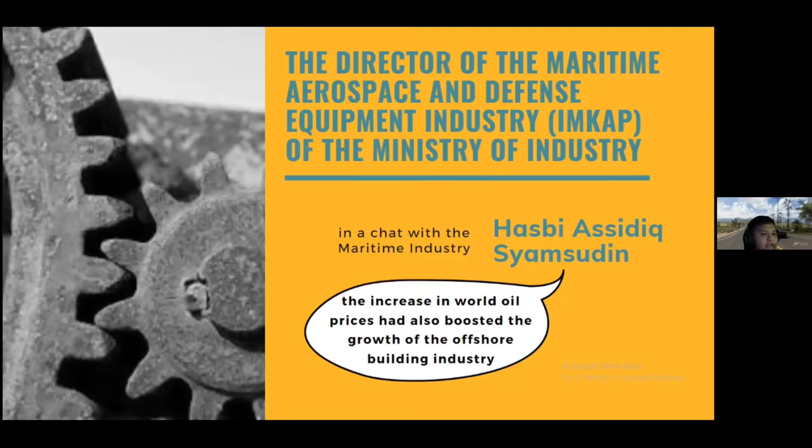Okay, in 1964 to 1965, American oilmen had tried their luck in Indonesia, but they were unsuccessful to obtain a contract to a search area northwest of Java for offshore oil. Then in early 1966, they finally got the contract after negotiating with the government and signed a production sharing agreement with Permina. The company that was first on the offshore scene in Indonesia was Independent Indonesian American Oil Company, IIAPCO.

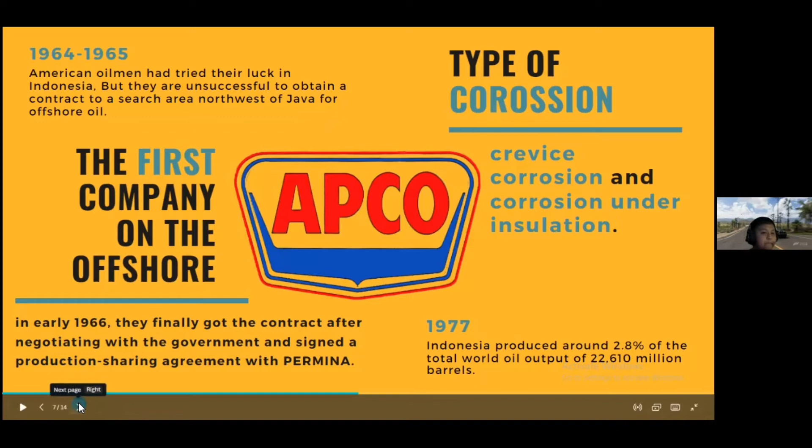And then in 1977, Indonesia produced around 2.8% of the total world oil output of 22,610 million barrels. Next. Building resistance. Rigs have an average age of 32 years. As claimed by The BLÜCHER sanitary discharge system comes in two stainless steel grades, AISI 316L and AISI 304.

What are the types of material commonly used for offshore structure infrastructure? First, lightweight steel. Lightweight steel is increasingly being used because of the increasing need for steel material that is lighter, strong, more economic, more durable, and easier to use. The profile formation can be carried out using a cold forming process because the thickness of the profile is relatively thin. In this process, the profile is formed from a steel plate or sheet into the desired shape with V rolls or a plate bending machine at room temperature.

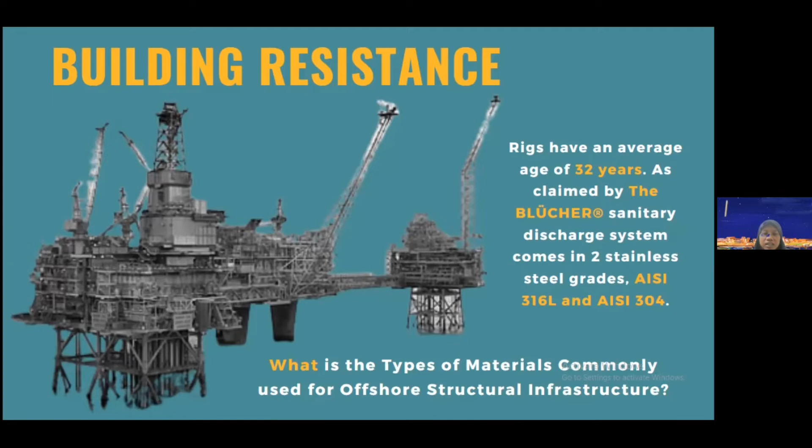Then stainless steel. Stainless steel is high alloy steel with special properties that are resistant to corrosion and high temperatures. Stainless steel has a chromium content of approximately 10.5%. This content protects the steel from the corrosion process. Chromium oxide is the result of the oxidation of chromium, which is formed spontaneously. This substance blocks the oxidation process of iron. Stainless steel has many advantages, namely sufficient toughness and cutting properties. There are four main types of stainless steel, namely austenitic, ferritic, martensitic, and duplex. Next.

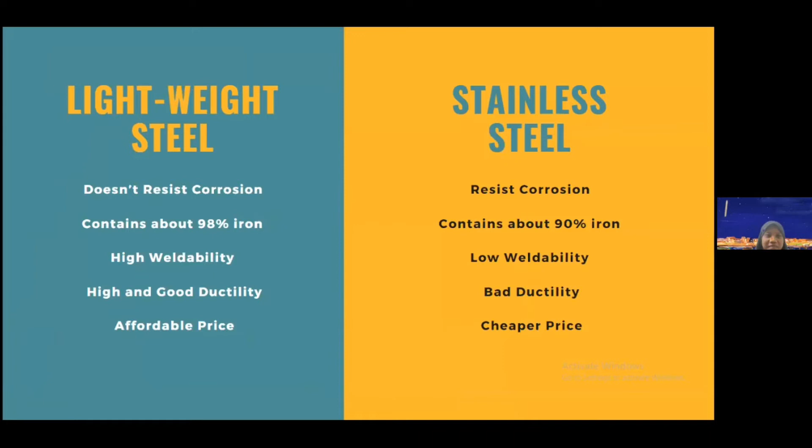There is a difference between lightweight steel and stainless steel. Lightweight steel doesn't resist corrosion, while stainless steel resists corrosion. Lightweight steel contains about 98% iron, and stainless steel contains about 90% iron. Lightweight steel has high weldability and good ductility, while stainless steel has low weldability and bad ductility. The price of lightweight steel is more affordable than stainless steel, while the price of stainless steel is cheaper than lightweight steel. Next.

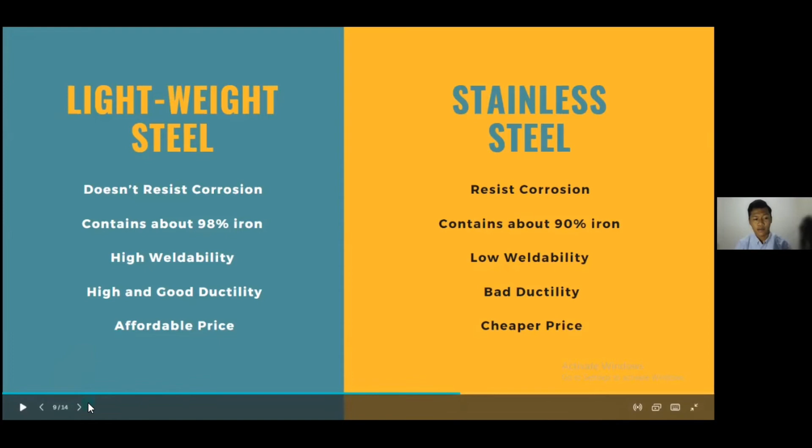So basically in this research, to examine the offshore structure corrosion aspects and effects, a qualitative method is used by taking literature review from reliable sources. This literature review is a part of the interactive model data analysis technique.

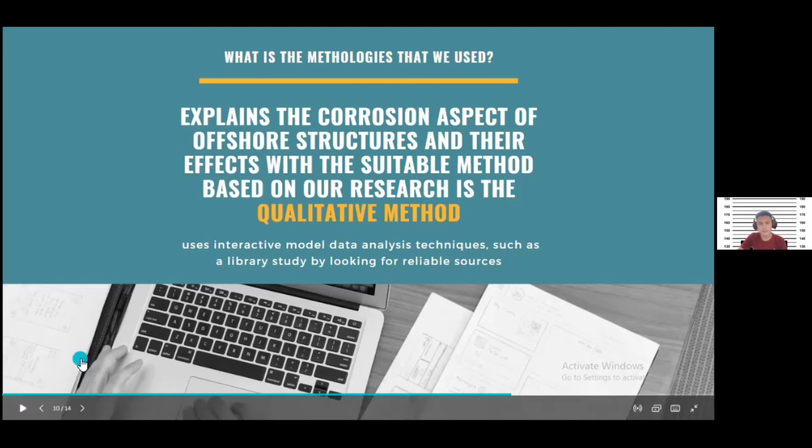Data analysis and results. An offshore environment is where the pipe experiences a humid and salt-containing environment, with the salt containing mainly chloride ions. The humidity and chloride content depend on the location of the pipe and conditions during the installation. These conditions are the water, testing of the deluge system, and washing of the plant with seawater. To minimize the risk of material failure at an acceptable cost, the term cost also includes maintenance costs in the total design life of the structure.

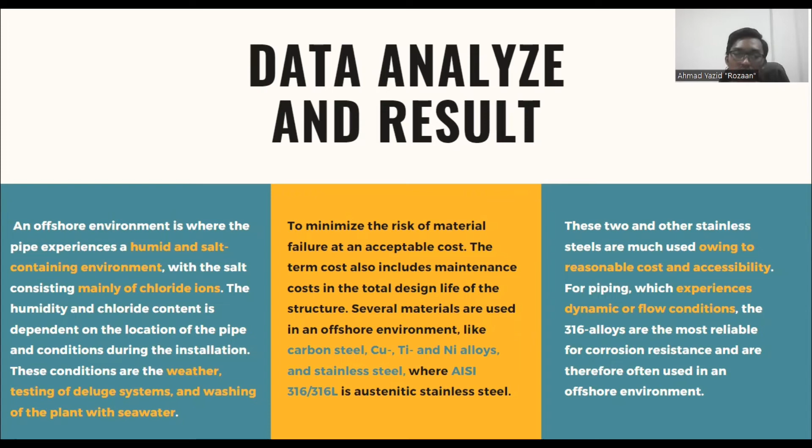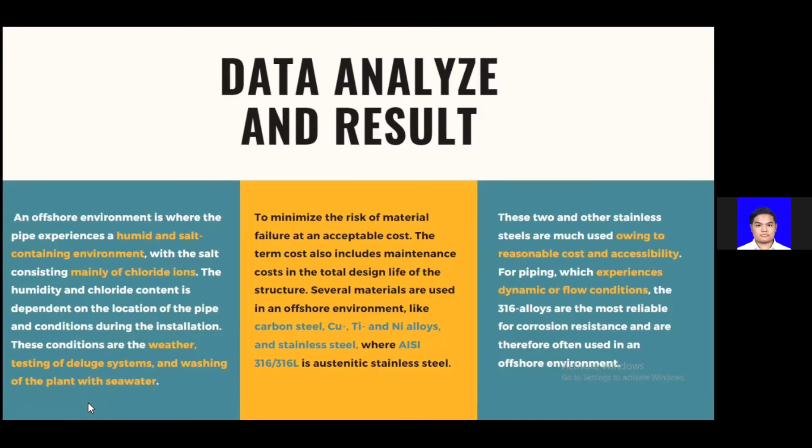Several materials are used in an offshore environment, like carbon steel, copper, titanium, nickel alloys, and stainless steel, where AISI 316 or 316L is austenitic stainless steel. These two and other stainless steels are much used owing to reasonable cost and accessibility for piping, which experiences dynamic or flow conditions. The 316 alloys are the most reliable for corrosion resistance and are therefore often used in an offshore environment. Next. The specification for composition of AISI 316 and 316L.

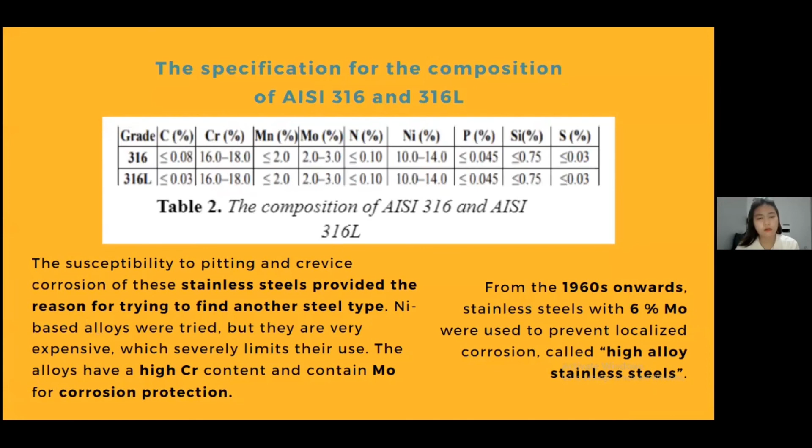The susceptibility to pitting and crevice corrosion of stainless steel provides the reason for trying to find another steel type. Nickel-based alloys were tried, but they are very expensive with severely limited use. The alloys have a high chromium content and contain Mo for corrosion protection. From the 1960s onward, stainless steel with 6% Mo was used to prevent localized corrosion, called high alloy stainless steel.